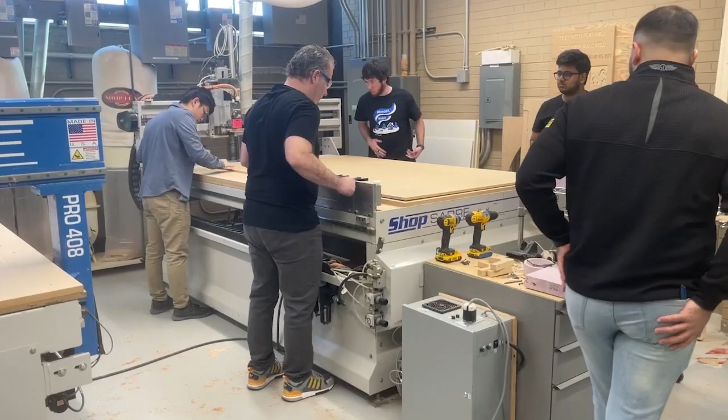We began at the front of the pavilion by the foot, and in this process we slotted the pieces of the reclined area individually into the section.

And then we moved to the back, where we put the perpendicular support members into the main tree section, which held this structure together. And then the next step would be to place the fins in each of the slots, moving up to the top of the pavilion, and then joining the front and the back together.

It was initially intended for the pieces to be a single member that spans the entire height of the pavilion, though the constraints of the CNC bed being a 4x8 bed created an issue where we couldn't feasibly have a piece cut out that large.

So in order to work around this, we created two pieces that were biscuited together, which allowed for the structural member to be spliced together in a way that would hold the fins up as well as the main body of the piece. And then these pieces were held in place laterally by these perpendicular members that would prevent sway as well as create more rigidity throughout the member itself.